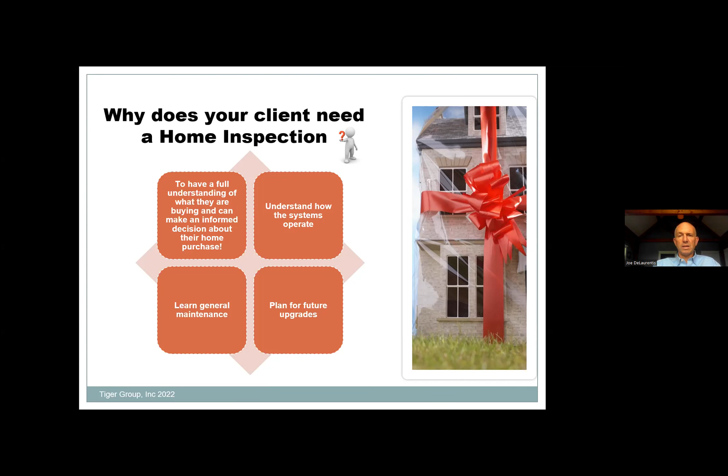The state does require us to inform clients of components that are at or near the end of their service life, so they understand they may need to save money for a furnace, roof, or other major component. Managing those expectations is very important.

No home is perfect, but that doesn't mean it isn't the perfect home for that buyer. We work with clients looking for everything from turnkey homes with nothing wrong, to others definitely looking for a fixer-upper, whether it's a little sweat equity or a contractor looking to remodel and resell. So it's important to set these expectations with clients.

My slide is frozen here. There we go. Managing those expectations can be as easy as forewarning clients what to expect, whether buyers or sellers, about the inspection. What's the inspector going to tell them? Do they need to be concerned about every little maintenance tip, or are we looking for the more important components and concerns?

The home inspection definition comes from the state of Connecticut, part of our licensing through the Department of Consumer Protection. ASHI is a more prominent national organization as well. You may also hear of InterNACHI, another one. They also have standards of practice pretty close in line with Connecticut's.

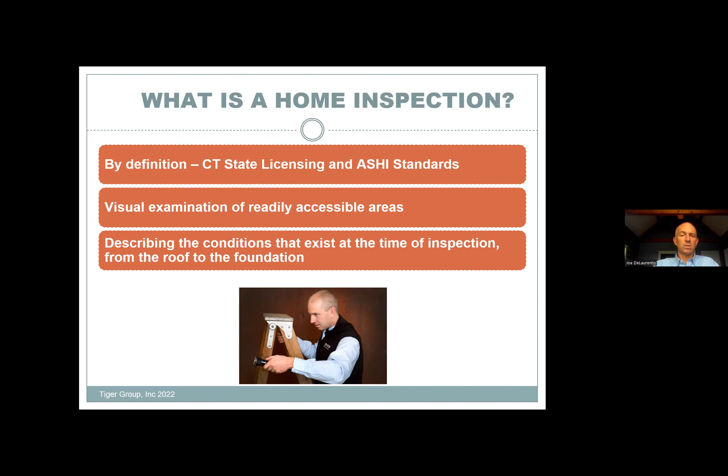Connecticut references a visual examination, and some home inspections glorify themselves a little. We are not going to pull homes apart and start cutting into people's homes to investigate these things—that's way different than what we're allowed to do in a seller's property. We describe the conditions that we see on the day of inspection.

The history of licensing goes back to the early 2000s. Before that, we had great variation in our industry, everything from a handwritten notepad with no form set or guidance, to an engineer's report delivered two weeks after an inspection with a long narrative. This licensing established a uniform set of standards for us.

These standards are required to be provided to every client before the inspection. Ours at Tiger are emailed to clients along with our agreement contract and a statement of the services they ordered, ahead of time for review. One of the bullets there is the most important: our real role is to identify significantly deficient components.

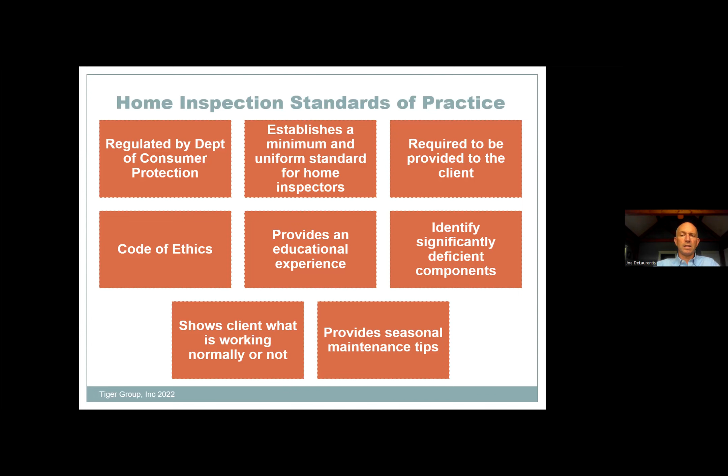Some of the subsequent things that have come out of the service are maintenance tips and an introduction to how a home works, and we tend to gauge that by the interest of our clients. I'm going to run through some of these components of a home rather quickly, and when we get to questions, if anyone wants more detail, we can cover that—some of this is a bit obvious.

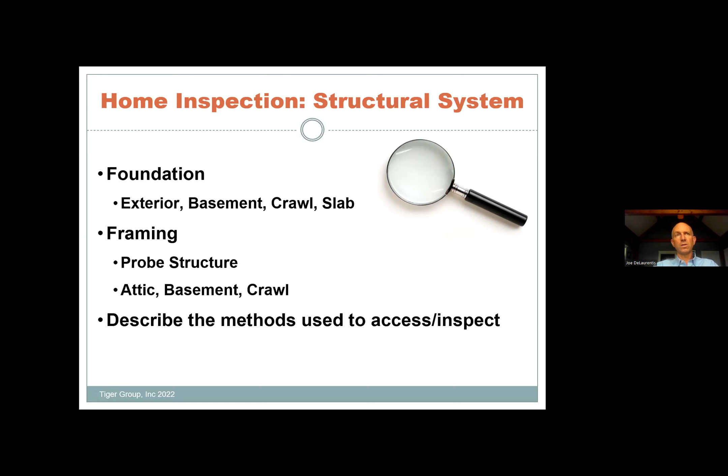We run through structural components, the accessible areas of foundations and framing. The last bullet is important: we're required to describe the methods used to access or inspect these areas—in other words, more importantly, what can't we get to. Take, for instance, a crawl space we couldn't get into; we have to inform clients they may need to take other action to get in there.

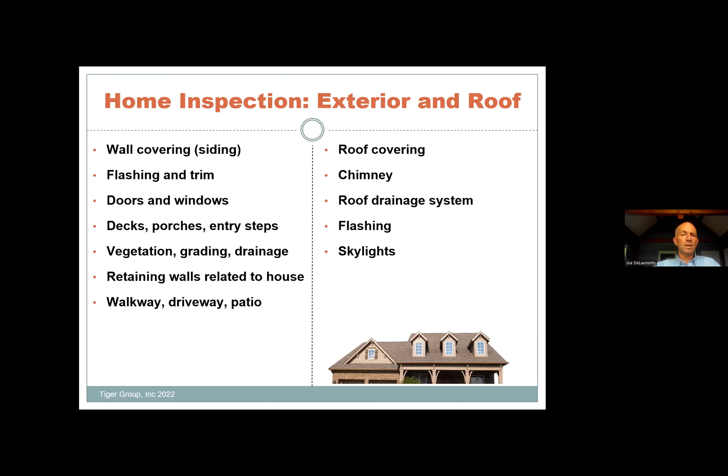Exteriors and roofing—typically these components' primary intent is to prevent the elements from getting at the building. So wall coverings, trims, flashings, and roof covering are always paramount for people. Chimneys tend to be problematic, since as a homeowner, most people aren't paying attention to what's going on at the top of their chimney. And of course, other things like decks and entry porches.

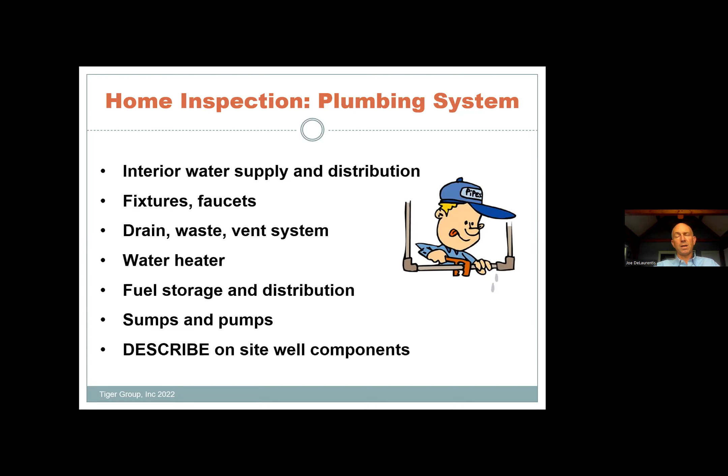And towards the end, we get into well water sampling. We'll also talk about our functional flow test, which Tiger offers as an alternative to not having anything done.

Electrical, we start outside at the service entry. How does power get to the building? And then how is it distributed throughout? Of course, the wiring and such.

You'll see us test at least a representative number of fixtures, switches, outlets, etc. The state uses that term because they recognize that we're not going to move all the furniture, every bit of storage and such to get to every outlet. That should not be misconstrued, in my opinion, down to just doing the one per room that's required. Frankly, I think you should get to, and our Tiger policy is to get to every outlet, switch, etcetera, that we can access to test it.

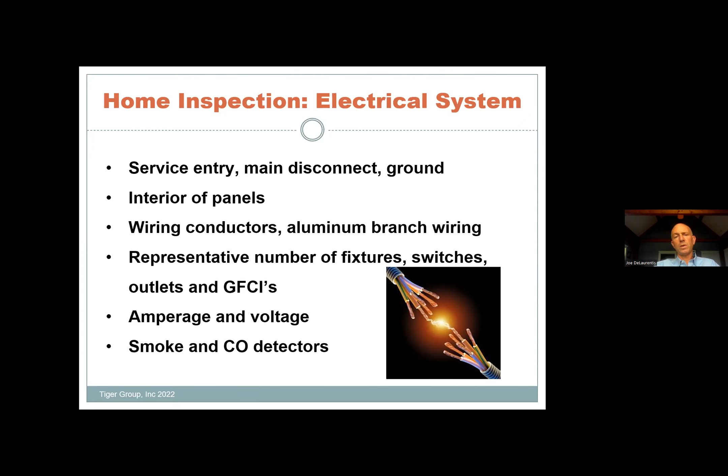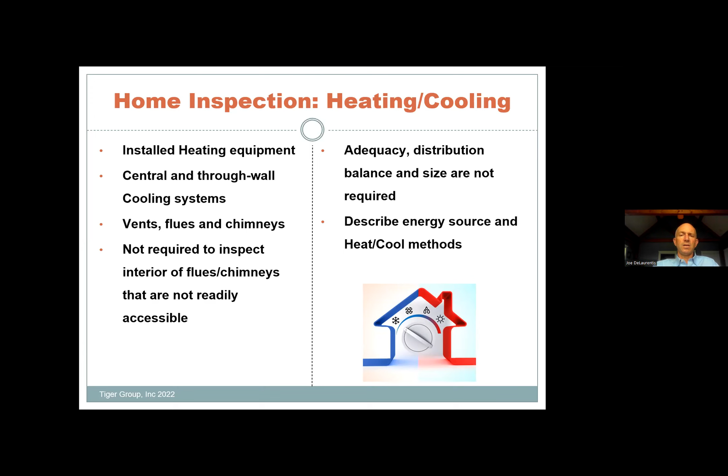Heating systems, cooling systems, of course we operate those systems. You may have some deficiencies seasonally. It's also important to understand that the state does not expect inspection of interiors of chimneys or flues, so we're not dismantling the venting for heating appliances. Additionally, a common question that comes up is adequacy or sizing of a system and balancing, how even is that heat flow on a forced air system throughout a house. All of these things require a lot more diagnostics than is required for a home inspection.

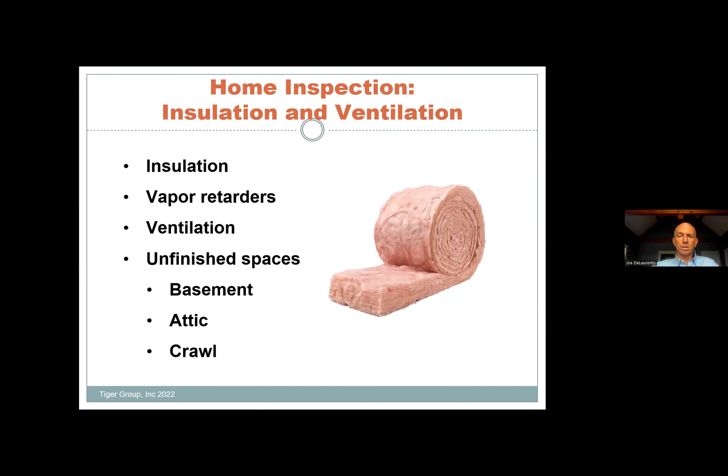Insulation areas, vapor retarders, all important information. We're going to typically alert our clients to what's there, or if what's there is damaged, missing, etc. It is not an energy audit that's going to test the whole home energy efficiency or blower doors and make recommendations to bring everything up to current energy standards.

Interiors, it seems quite repetitive when people are watching a home inspection. We're looking at all of those electrical outlets, operating all of the windows in the house. Yes, some of these can be simpler type items, a window that doesn't work right, or locked hardware that's not functioning. But really why we sample all of them is to try to see, is there a bigger problem? Is there a repetitive issue? Are we leaning towards the fact that these older windows have so many issues that maybe restoring them isn't the best course? Perhaps the client should look at window replacement budgeting.

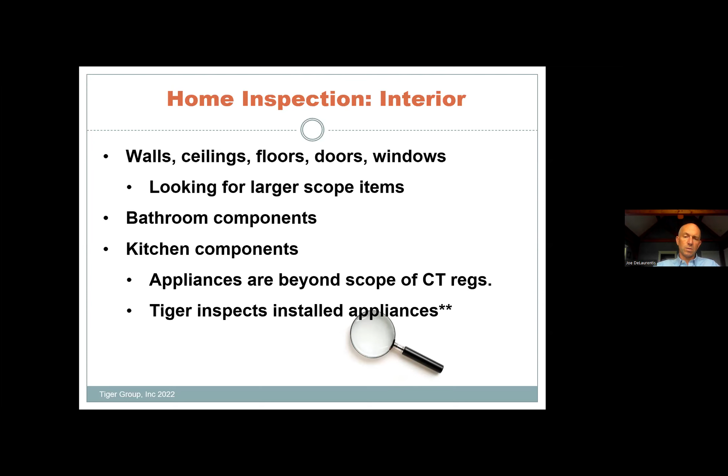Kitchen appliances are exempt from the standard of practice in Connecticut. However, you will see some variation in the market. We at Tiger have chosen to inspect those that are permanently installed appliances. That includes cooking appliances, ovens, cooktops, ventilation for those, installed microwaves. We do not inspect laundry equipment or refrigeration, so be aware of that as well.

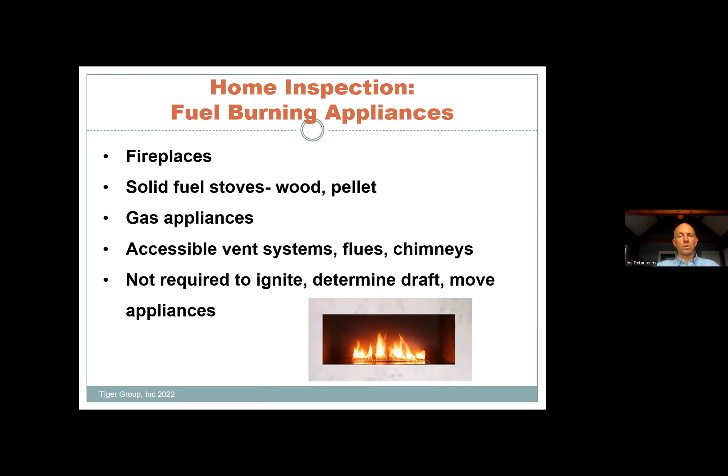Fuel burning appliances, we will inspect wood stoves, pellet stoves, other gas stoves, and fireplaces themselves. Seems obvious, but we are at least a few times a year requested in the winter to ignite those and test them. Certainly not something we can do with wood fireplaces. Of course, if there's a remote available or controls for a gas appliance, we would certainly be able to light those.

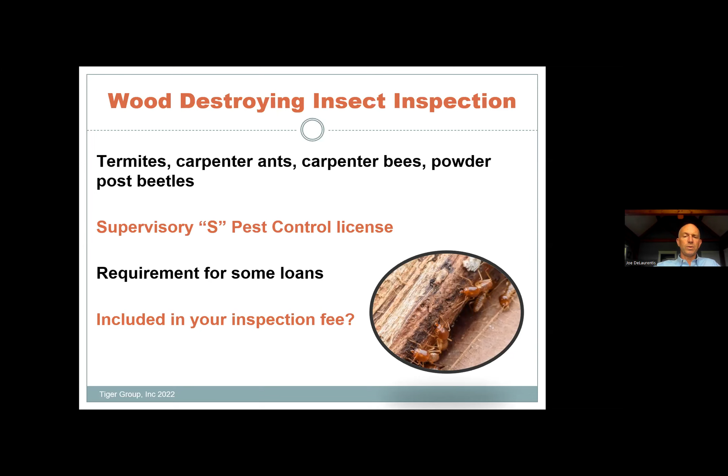Kara mentioned the wood destroying insect inspection. This is not required as part of a standard home inspection. Be careful of people that say something like, yes, I'll look around for them, but I can't provide the appropriate paperwork. This tends to be a little bit gray when push comes to shove. Perhaps someone needs the National Pest Control form, which must be filled out by someone with the pest control license for their lender. And this is where you get day-before-closing concerns that come up. So at Tiger, as Kara mentioned, we have licensed personnel to provide the wood destroying insect report with every home inspection. It's included in our fee.

So what about reporting? Well, we believe verbally we should explain and direct clients, as well as in the written report, to correct or monitor a situation, describe some simple maintenance tasks to people. When needed, the state recognizes and states that you should suggest further evaluation by a contractor, a tradesperson, a specialist, perhaps, in order to determine the extent of a concern, the scope of work to repair it, perhaps, and any pricing.

It's always important that people attend. They get much more value out of their inspection process if they do so.

Any questions, Kara or Sue? Who's doing questions? Sue? I'm doing questions. Thanks, Joe. I have one that just popped up. Yep, and I have two that came to me separately.

Sometimes you see orange or black lines on the walls in the basement. What does that mean?

If you're referring to stains on the foundation that start at the top of the wall, I'm not sure about black, but orangey dirt-colored stains are typically from construction, when they're backfilling the outside or inside of the foundation and mud and dirt drip down the walls. If you're referring to black, it's not so much in the basement, but you could have carbon accumulation from soot, maybe a puff back at a furnace or oil appliance. It's hard to give a good answer without knowing the circumstances.

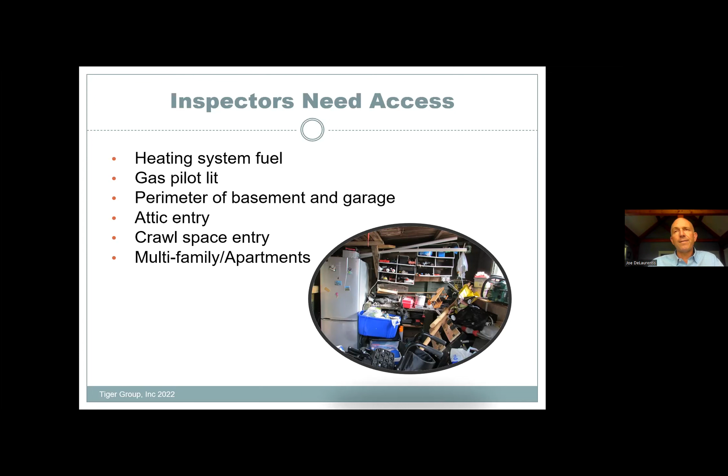All of these make inspection day go a lot smoother. Time on site is important to everybody involved, clients, sellers, you as realtors. So the smoother path that we have, the more efficiently we can go through without having to ask permission to clean all the storage out of a closet to get in an attic.

We just talked about the snow return. Also, remember, air conditioning, now is a great time of year. If you're taking listings in the fall, remember to make sure your clients have their central air conditioning system serviced. There's nothing better if it gets too cold and we can't run those in the winter than having a fresh service receipt to provide to a buyer and say, look, we had the system reviewed and serviced. It's working just fine. That'll help you get past any of those older equipment issues as well.

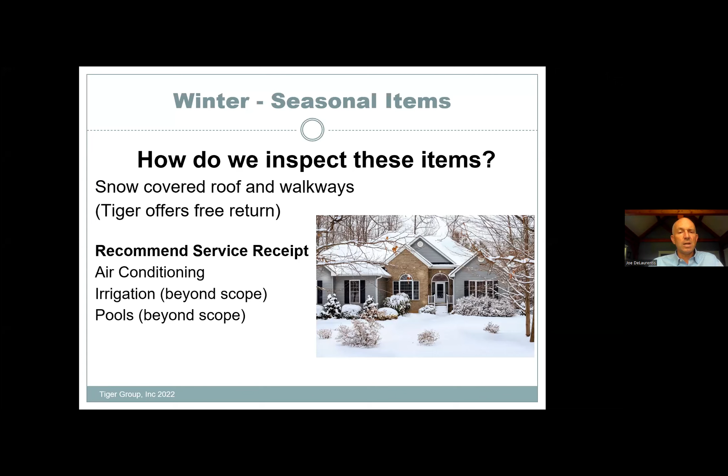The other things that are not part of a home inspection, but good to also have serviced before winter, are lawn irrigation systems and pools, so that again, you take the wondering out for the buyer.

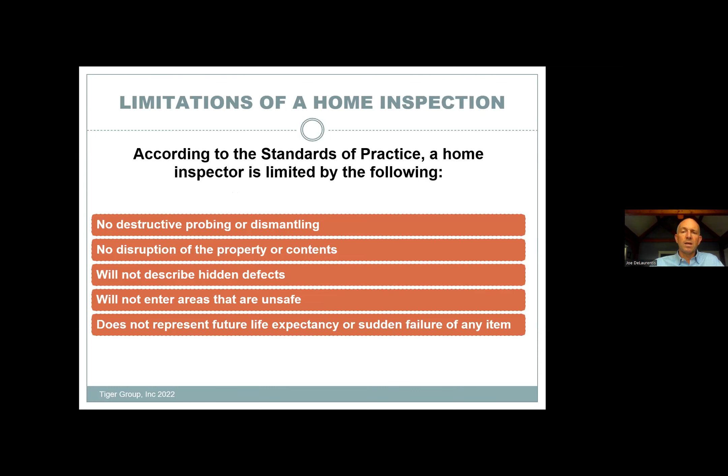Some of the limitations that the state recognizes: destructive probing, dismantling of things. If we see a large ceiling stain and we're not sure what the cause is, we're certainly not able to go ahead and cut that drywall open. There may be hidden defects behind some of these things, and representation of future life expectancy, or exactly when something may fail.

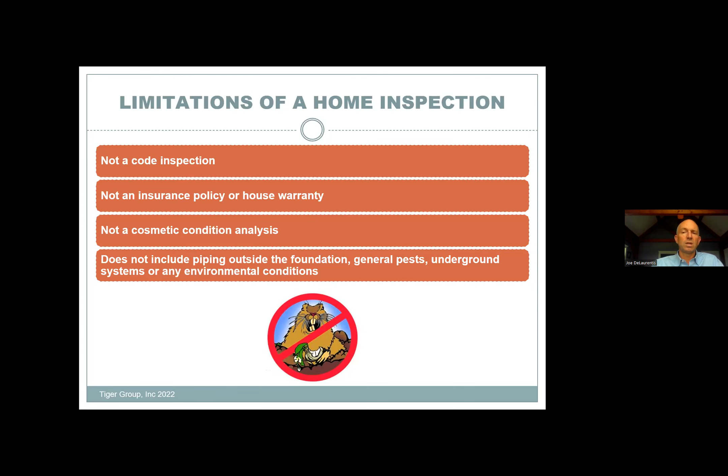Insurance policies, home warranties, all provided from different sources and not, according to the state, part of a home inspection. They also recognize that piping outside of foundations, general pests, underground systems like oil tanks and such, according to the state, are not intended to be part of a home inspection.

I talked a little bit about reporting already. We use a summary with our report, both verbally at the end of the on-site inspection and in the written report. The state does require that a written report be provided to be considered a home inspection. So keep that in mind.

You'll see some variation, but most of what's in the market is delivered either through website link or by email, and perhaps would include pictures, and some will include the summary.

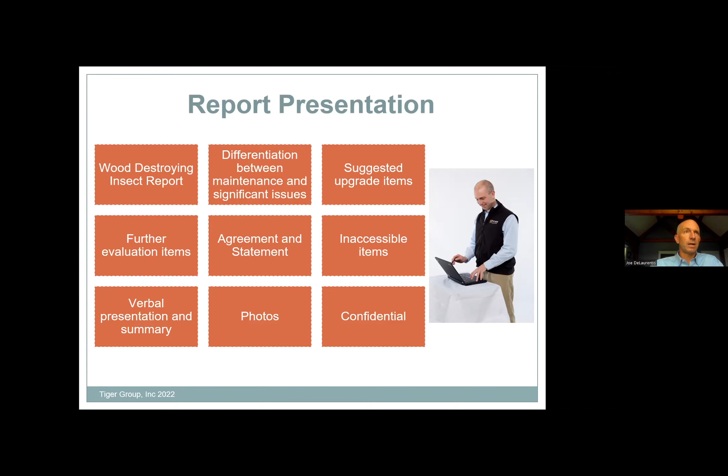We also, like you from Consumer Protection, have a code of ethics. We are supposed to maintain the reports as confidential unless we get permission to deliver it to other parties. So perhaps, again, preparing for inspection day, have that conversation with your buyer client so they're aware if they want to share reports with you as realtors.

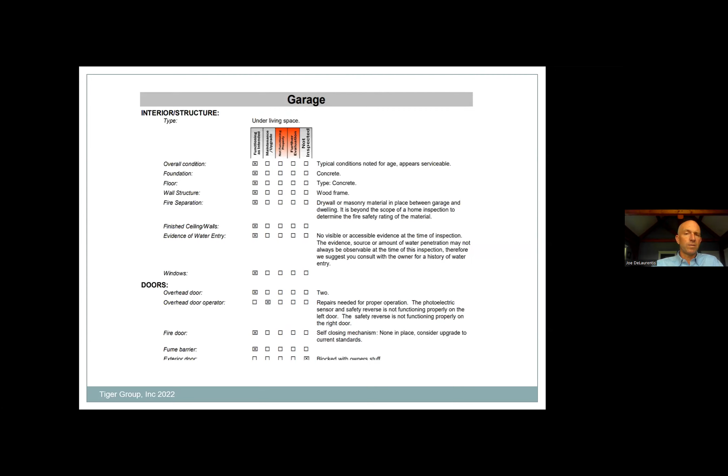Quick example of our report page. There's a rating system in the center. The two highlighted, or orange, would move things over to the summary area. Those are things that are not functioning properly. They need repairs, replacement, or recommendation for evaluation by a contractor. The narrative to support why things are rated the way they are is in the right-hand column, and the report is effectively broken down into each different section of the building.

Another question break. So you got anything? Nope, all set. All right.

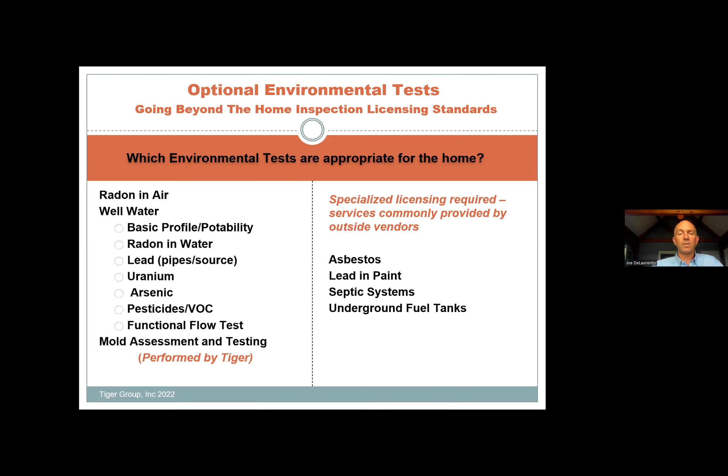Moving on to optional environmental tests that may go along with a home inspection. Many of the standards, radon, air, well water, are fairly typical. We also offer mold assessment, which we get more and more inquiries about every day due to concerns with indoor air quality. And then some things beyond a home inspection that may require specialized licensing, like asbestos testing, lead paint testing, septic systems, of course not something that would be part of a home inspection, and underground fuel tank investigation.

Radon, some simple facts about this. And if you're curious, we also on our YouTube page have a 1-hour radon course, and it's also something that we can provide as an office seminar as well.

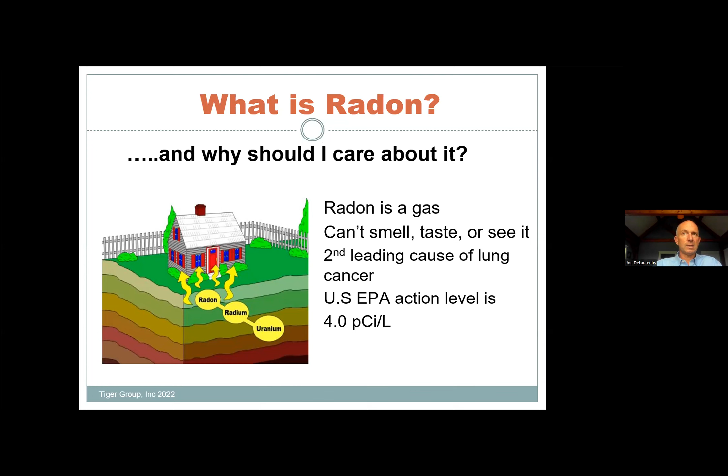Radon is a gas. We can't smell it, taste it, sense it, etc. Therefore, the only way to test is with an EPA approved device. The EPA has set an action level of 4.0 picocuries, in other words, 4.0 and above. They recommend either long-term testing or mitigation. Testing methods, you may have seen some of these on sites in use.

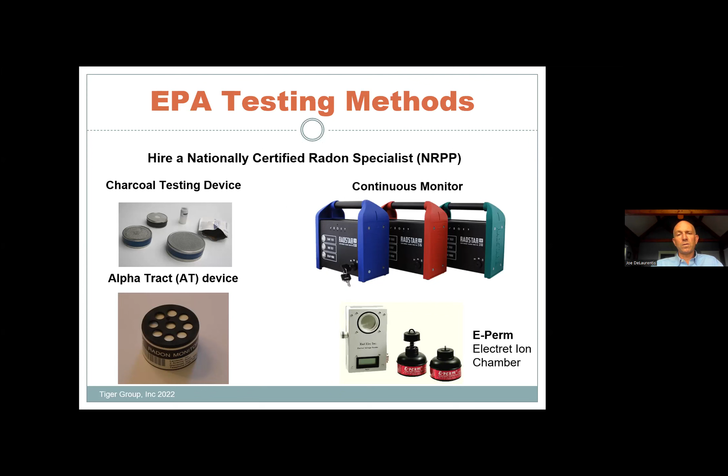We use continuous radon monitors at Tiger so that we can provide good data to our clients. First and foremost, it reads radon levels every hour throughout the minimum 48-hour test. It also tells us temperature, humidity, barometric pressure changes, and there's a tamper alarm. All of these things can be analyzed when we pick up the device to understand: did we get a good test? Was there an impact from that nor'easter storm that came through? Do we need to leave the device for a longer test? The good data, the appropriate data, is what's important for using those continuous monitors.

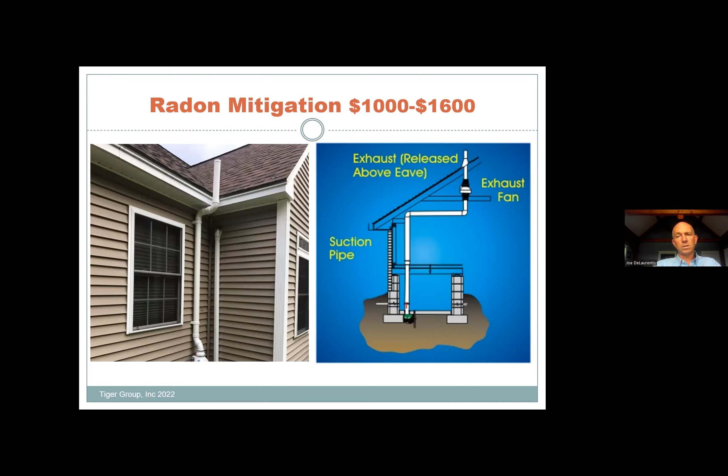Remember, with radon testing, it's important to use certified individuals. Our entire environmental team has to attend a 16-hour course and pass a rather difficult test to get their certification. They also have continuing education, just like all of you, to maintain that certification yearly. This keeps them up to date with the devices, the testing protocols, et cetera, with radon testing. So I find it's more and more important for things like device placement, types of devices used, and using them appropriately, to work with certified individuals.

We'll run through some well water tests here. The first one, staying with the radon theme, radon in water. Important takeaway if you're not familiar with it: the EPA does not have a national level for radon in water. Connecticut's Department of Health has created a guideline of 5,000 picocuries per liter. In the Northeast, we have some of the highest areas. Private wells in Connecticut test averaged around 3,000 picocuries, and they use that as the baseline for setting their level.

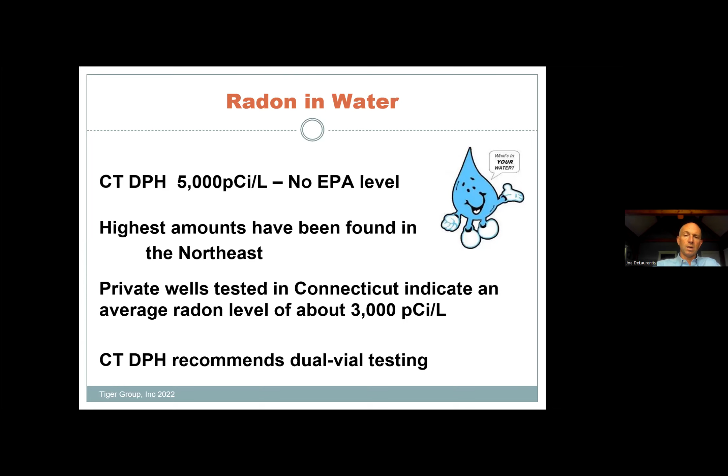Another important takeaway is the Connecticut Department of Health recommends a dual vial sample. If a single vial sample is done, the next step one should take is to take another sample, not to move to remediation or mitigation. This is extremely important when you see some of the prices to mitigate for radon water - you want to be sure the testing was done conclusively. Because of this, we moved a long time ago to doing the dual vial sample at the first visit. It's the only way we offer the test, so our clients get the appropriate information on the first test and don't need to move toward a second.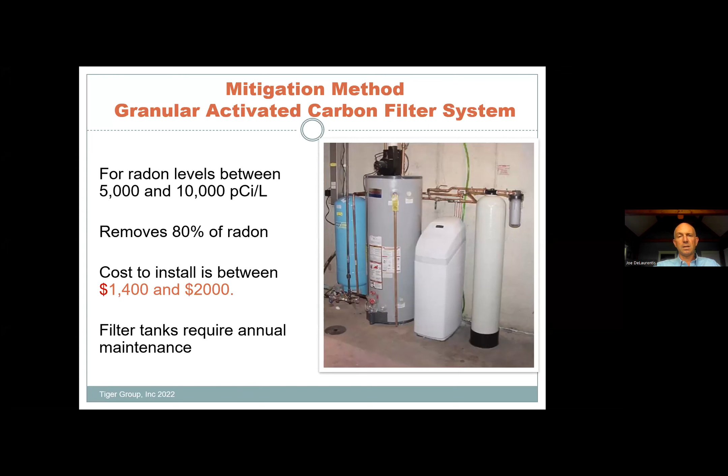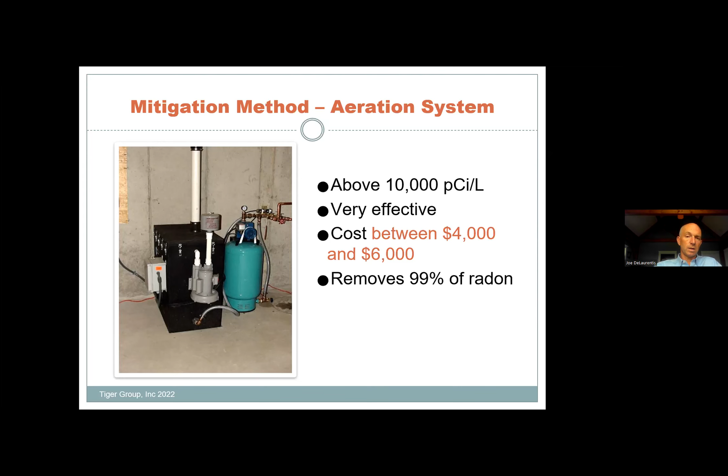The second mitigation method, which is nearly 100% conclusive - and this is where it gets very expensive - you can run almost up to $6,000 for an aeration system, also known as bubble-up systems. They're very effective. You'll see a black canister in the basement with an aeration system, as well as a secondary pump to repressurize the water. So the systems do get a little bit involved.

Next, we have our potability test. This is probably the most common water test done historically - we've always done this one. It includes bacteria and nitrate nitrogen. Those are the most important too, because they can deem the water unsafe for drinking if they're high or present. The others are water quality type items, and certainly many people treat for these. In the shoreline areas, or a lot of Connecticut frankly, we have hard water, minerals in water and such, so it's not uncommon to see a well system with treatment on it.

If you're not working in an environment with wells all the time, remember when you have clients that haven't had a well, they may see a treatment system and become concerned. Setting them up and preparing them for the inspection, it's important for them to understand wells are very common in Connecticut and treatment systems are very common on the wells. It does not indicate a problem per se.

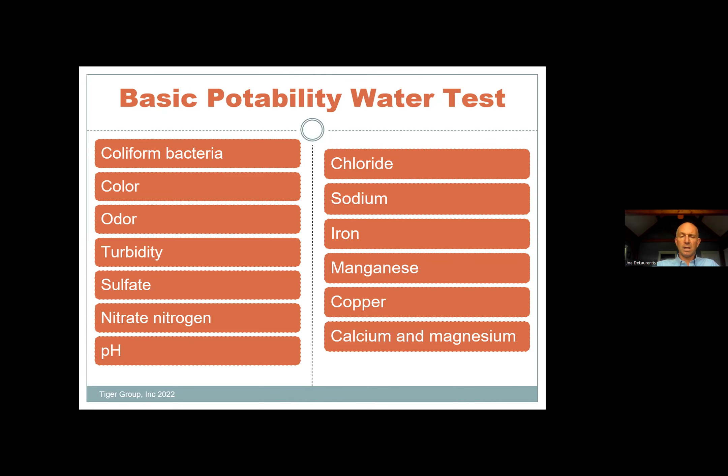Some other water tests we have are pesticides and volatile organic compounds, two examples of site-specific tests. People would do pesticide testing if near a golf course, farm, or orchard, or land converted from one of those to a subdivision. VOCs are also site-specific, related to proximity to an industrial or manufacturing source, or even an on-site oil tank. My neighborhood is near an old abandoned rail bed, and there are some issues with VOCs remaining as well.

Arsenic and uranium—you've probably heard about these either in the media or through client interest in testing. The State Department of Health in Connecticut recommends testing for arsenic and uranium at the time of a real estate transaction, as well as when a new well is drilled. This became more important based on a U.S. Geological Survey, after which the Connecticut Department of Health recognized the potential for elevated levels throughout the state.

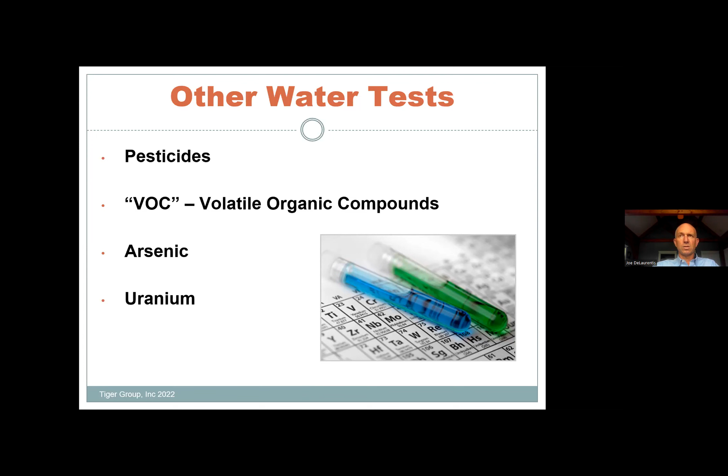Earlier, I referenced the functional flow test. Through our home inspection, although we're not required to inspect the well system, we do inspect it partially to look at the components on site. For clients interested in something more, we offer this functional flow test, where we review the equipment on site in more depth than a standard home inspection and report on the condition and performance of the well.

Once we look at the equipment and see how it's functioning by running water throughout the house, checking household pressures and usage with multiple fixtures, we'll then run the water for another 45 minutes outside and get gallons per minute and pressure readings to determine if there's appropriate water for normal household usage.

Remember, these tests are different from a yield or recovery test. Yield tests are done when a new well is drilled. Recovery tests require removing the top of the well, measuring how much water is in it, draining it down, and seeing how fast it physically recovers. We don't get involved in that when we do a functional flow test. I'd definitely advise people with concerns—maybe the seller disclosed something, or they've never had a well and are extremely concerned—to take the next step and get a well company to do a recovery test if there's more of a concern.

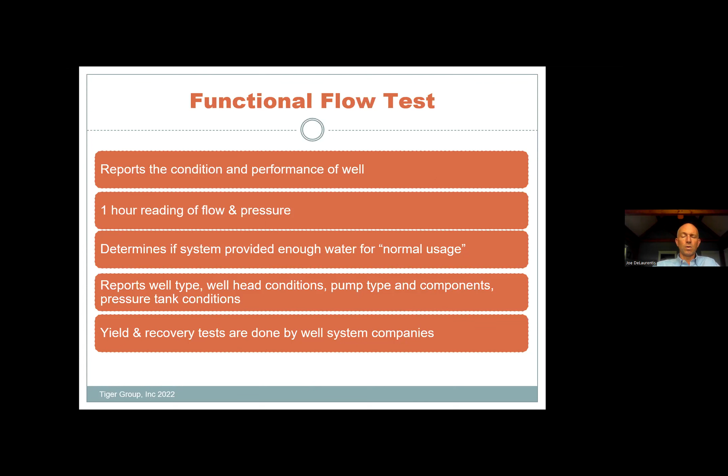Moving on to mold in homes. Some 10 years plus ago, we were getting consistent requests for mold testing and referring those out. We never really wanted to be in the mold assessment or testing business, but by nature of continued requests and the knowledge we already had about homes, we've created a mold assessment.

In order for mold to occur in a house, you need moisture—this is really the key to all of this. That can be in the form of a leaking roof, plumbing issues, damp basements, or improperly vented appliances, as you can see in some of these diagrams. Frankly, we as occupants and the way we use houses make a lot of moisture. We're continually changing sealing, insulation, and construction methods, and sometimes it's trial and error. We see more moisture accumulation, so we're dealing with a lot of mechanical ventilation now in construction.

Once that moisture combines with an organic material—wood, wallboard, anything mold can grow on—after the moisture saturates it, you get mold growth. From there, what impacts us is the spores released into the air. That's why you see mold testing that includes indoor air samples.

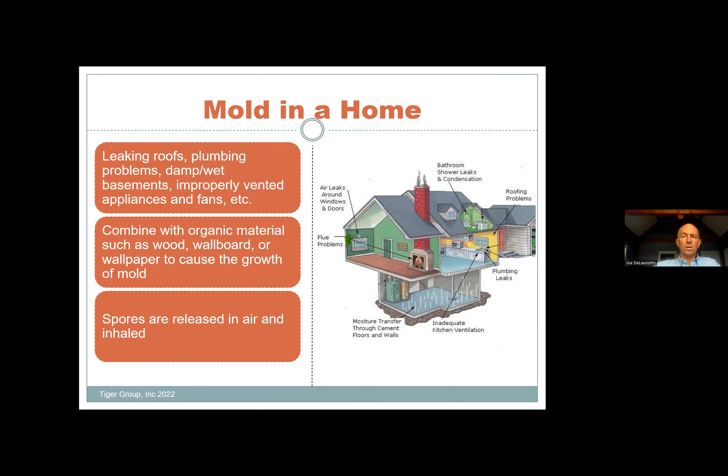Who needs a mold assessment? We get requests from a variety of clients. Some may have had a prior issue in their home, like a water entry event. Many simply have allergies, or family members do. There may be increased sensitivity groups—those with respiratory or pulmonary issues tend to fall into increased risk, and they may want to test their properties as well. Outside of real estate, we've seen increased interest, working with more homeowners on their own indoor air quality after they've been living there a while.

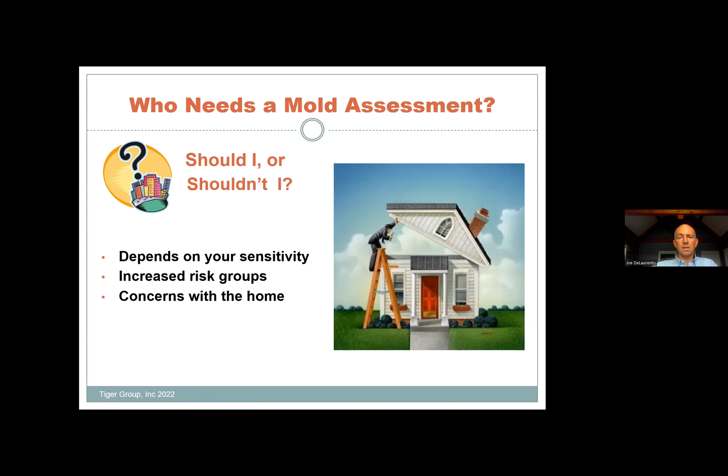Maybe now they're home office in the basement or some such, and they're continually sneezing, affected by indoor air quality. So we're seeing more requests for that.

So what we did to develop our mold assessment, we noticed in the industry there were remediators who were doing some testing. Most of them came from an insurance or water cleanup kind of environment, and may have had some dramatically expensive solutions to mold problems. Others, we saw some simple sampling being done by home inspection competitors.

So we wanted to include a thorough assessment of the house, including looking for mold, of course, but any moisture sources, some advanced tools. We use infrared cameras to find temperature anomalies that can lead to moisture issues. We follow up with checking those areas with a moisture meter, and going through the house as part of our site inspection.

From there, we make recommendations to clients based on their input or interview as to their concerns, as well as what we found, to talk about where they would like to sample. Do they want a surface sample of some visible mold? Do they want air samples beyond the normal living spaces, perhaps in a specific bedroom or some such? Those samples are then analyzed by the laboratory.

When they come back, rather than sending our clients this very confusing and sometimes quite scary lab report alone, our mold assessment staff takes that report, looks at it, compares it to what they saw on site, draws some conclusions. Okay, we need some standard homeowner cleanup at a small amount of mold that was identified, didn't cause, as an example, some high levels on the lab results.

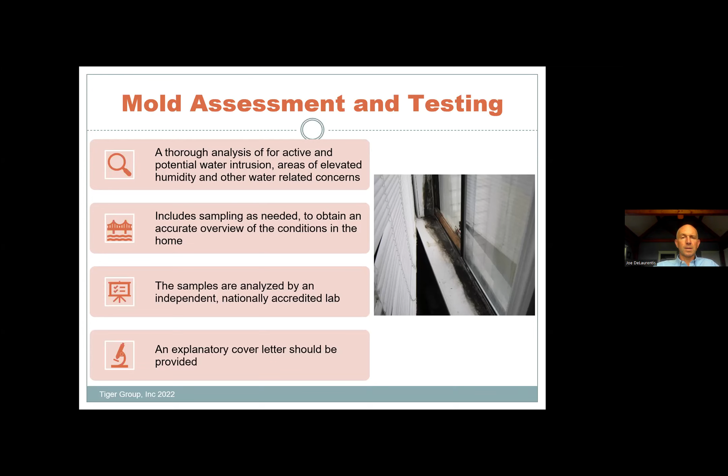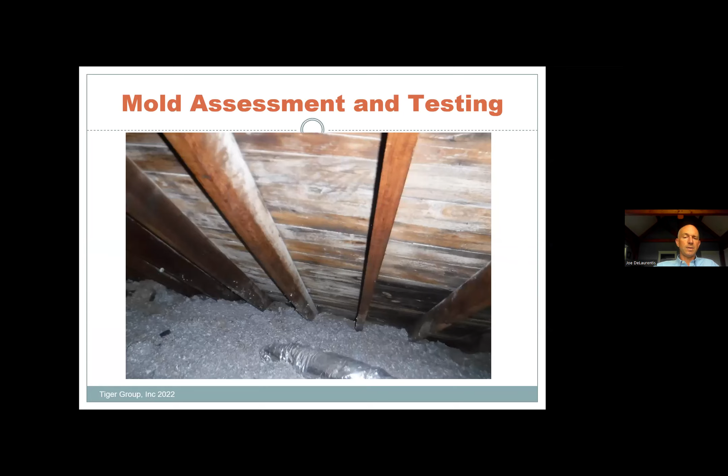Very, very commonly, we're seeing moisture accumulation from condensation in attics, and of course the opposite in basements. This time of year, with that run of high humidity that we had, we tend to see the moisture accumulating there in the summertime, attics in the wintertime.

Moving past mold to some of these other tests that we don't do as home inspectors. Asbestos testing or inspection in Connecticut requires an asbestos abatement license. Unfortunately, there is nothing between A and B, and the abatement license is quite difficult to get. So you need to get a licensed abatement company to do any sampling or confirmation of asbestos materials.

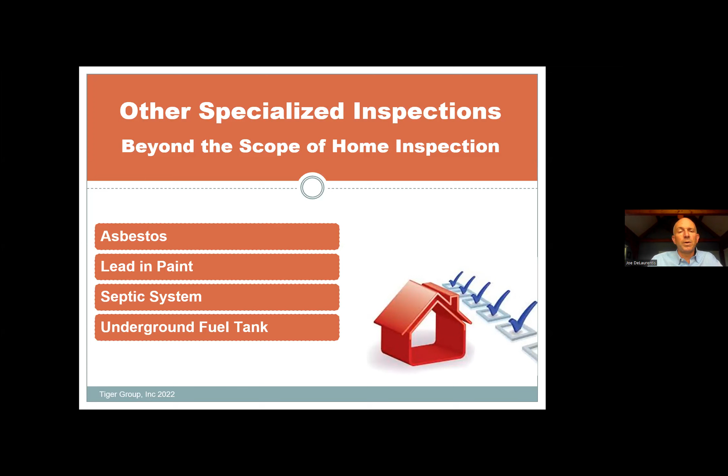Lead paint, of course, can be tested. Septic systems, we'll see a quick image there to help you understand what they're doing. And then, of course, underground fuel tanks.

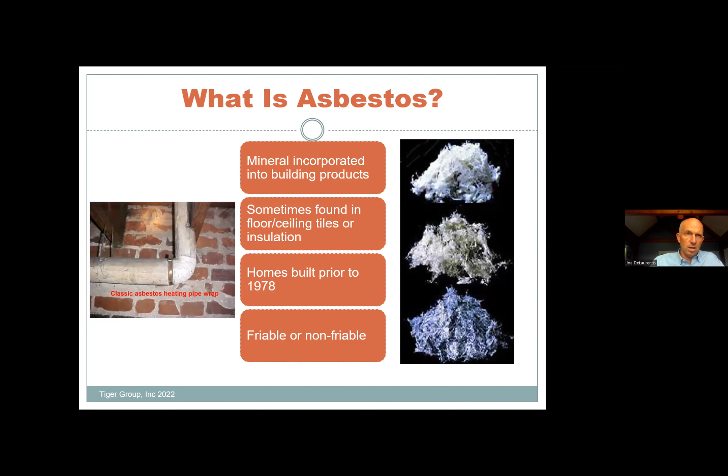Some samples of asbestos, you most commonly see it in some of this pipe insulation remaining. We'll see another image of vermiculite insulation, but built prior to 1978, so easy to remember based on your lead paint disclosure date as well. Can be in floor and ceiling tiles, heating insulation, heating appliances, and things like that.

There's that vermiculite. Zonolite, if you're able to write that website down, zonoliteatticinsulation.com. I can't confirm it, but there may still be some money in that class action lawsuit to assist in vermiculite abatement. We see this most commonly in attics, but often in walls as well.

It's a loose insulation that would have been installed. Sometimes not possible or difficult to see because it's been insulated over with loose insulation, like a loose fiberglass or even fiberglass batt insulation. So something to be aware of there.

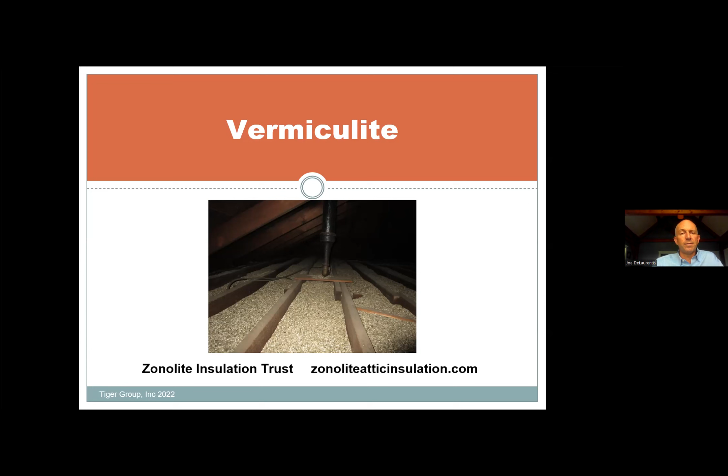Important takeaways for clients are the ages here, heaviest in the 40s to 60s. 1978 is when they lowered the content allowed in paint and lead paint there. Their disclosure does a great job of informing people. And frankly, when asked, if you're buying a house built before 78, you should be aware of the potential presence.

Take necessary precautions. There's great information from the EPA. You know, if you're doing work yourself, and if you're hiring contractors, they are required to be certified to work on older buildings as well.

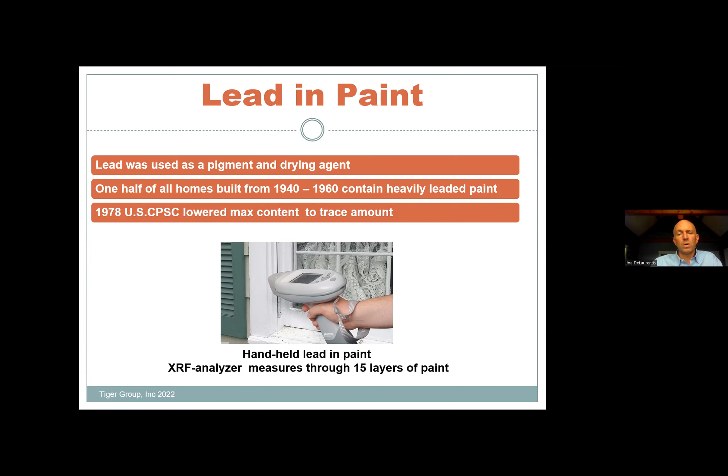Then levels in the tank to make sure everything is leaving the tank appropriately. When you hear conversation about baffles, those are intended to - sorry to gross you out near lunchtime - keep the

solids in the tank and let the effluent leave and go out to that leaching system. If you hear conversation about a distribution box, that would be right next to the tank where the pipe splits to 2 runs. That's where you have a distribution box that can get clogged. And then, of course, the leaching system is underground, not usually accessible, only able to be viewed with a camera,

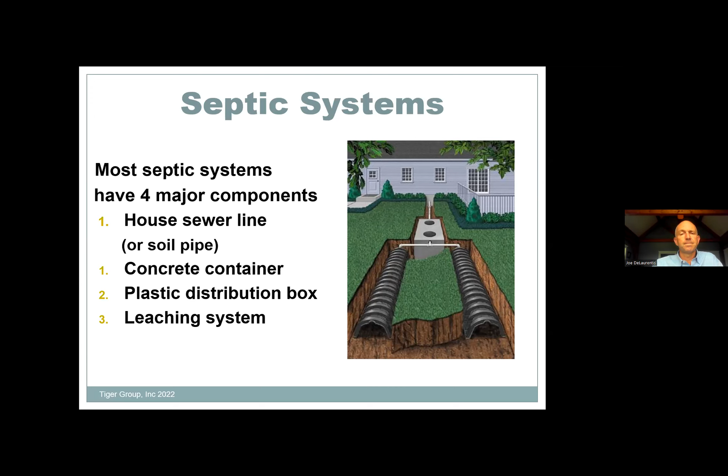which a lot of septic inspectors are using now as well. Underground fuel tanks, by the state's definition of a home inspection, we're not required to inspect for them.

We may see some indicators of a prior oil tank and recommend to our clients to do some homework, find out from the sellers if they have proof of removal or if there was ever anything on site. Sometimes you need to go back to the fuel delivery companies that have been servicing the house, or perhaps the local fire marshal - that's usually the local authority that kept track of that. Very difficult with our small towns in Connecticut to have records and find out who did what when, but that's the best course of business there.

There's no state regulations for tanks less than 2,000 gallons, so most of our residential stuff does not have to be removed. However, lenders and/or closing attorneys most commonly are going to suggest proof of removal or abandonment, or getting it done beforehand.

Tank life varies dramatically by site conditions. Was it put into moist, damp soil? Was that tank scarred at all with the excavator when it went in? What kind of quality of tank was put in? And we're referring to steel tanks that are the concern.

You can actually still install a newer concrete tank. They have all kinds of safety precautions in place and such. Not commonly done, but you may run into some of that as well.

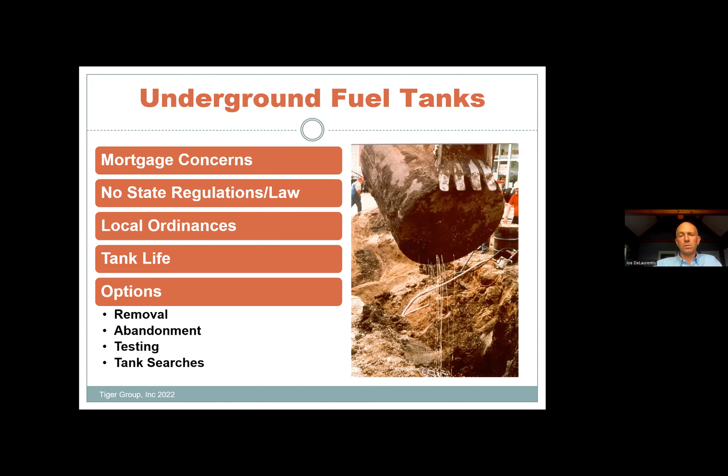Any questions, Sue? Yes, I have a couple. I'll talk about mold first. If mold is outside, how can you tell that the mold in the house isn't just from outside?

Great question. Any mold air sampling should be done with a comparison, so we always take an outside control sample, same day, same time, and then any interior sampling is compared to that sample. Best case testing has the house closed up, meaning windows and doors other than normal entry and exit, just like radon, for 12 hours before mold sampling is done.

Is a mold assessment part of the general inspection, or is this an additional service? It's an additional service - another great question, sorry I ran past that - because it's a different set of certification and different process. We do have a separate fee for it. That fee starts at $425 and includes 2 samples, and then additional samples are charged independently based on the client's choice of how many they want to do.

Okay, that's it for now, actually. Great, thank you.

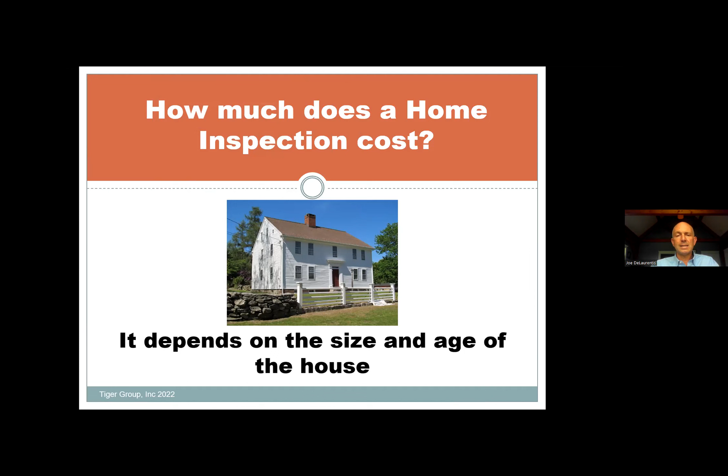Prices of home inspections - you will see not huge variation, but some variation in the market. Key takeaways for clients is what's included. Often a big variable is whether or not the wood destroying insect or termite inspection is included. But generally it depends on the size of the house, perhaps the age of the house, and any additional significant outbuildings, barns, apartments on site, and what have you. Average fees should be in the 500 to 700 range.

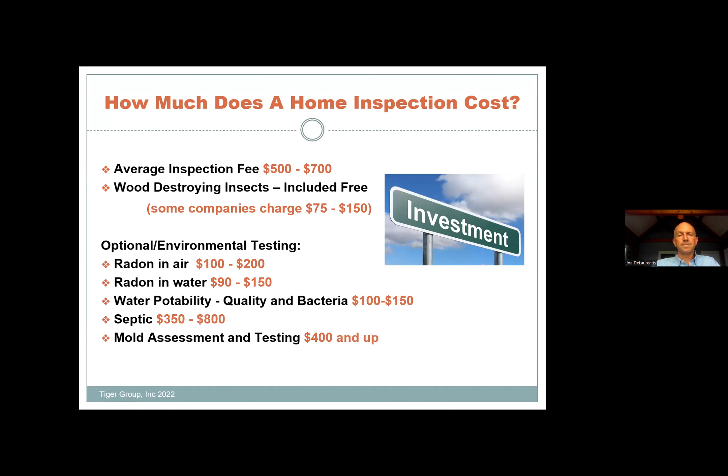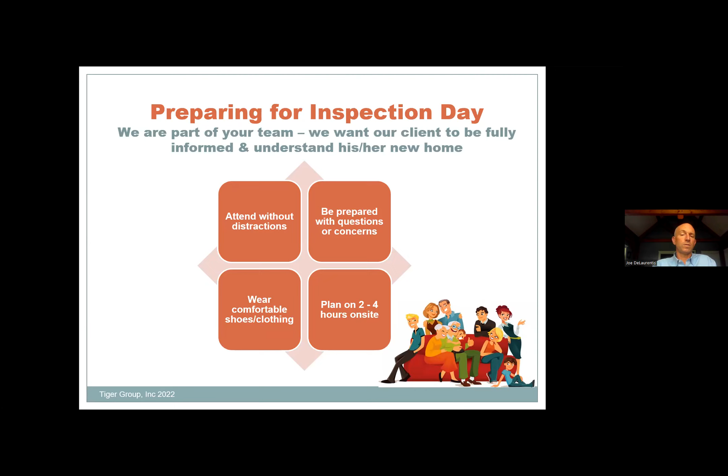Preparing for inspection day - I've touched on this a little bit throughout, but prepare your clients to attend as best as we can in today's world without distractions. They should be prepared with any questions or concerns. That's how we start every inspection, talking to our clients about what they've seen, what their specific concerns might be. Plan on anywhere from 2 to 4 hours on site based on size and complexity of the house itself.

Remember to prepare your sellers as well. Makes things a lot easier when the seller is not there, however many people have to be if they're going to be around. Important for them to understand - one of the biggest shocks we see is they don't often know that the buyers might be coming, and the buyers might be bringing their parents, kids, friends, their decorator, their contractor. So prepare your sellers just as much as your buyers for what may happen on inspection day.

Choosing a home inspector, it's important to understand that inspectors should be fully licensed. There is an intern program in Connecticut required to get our licenses, which is 100 inspections done under a supervisor. Once you satisfy that, you can take the National Home Inspection exam and get your license. Unfortunately, Connecticut left out any cap on the time frame to do that, so you're actually allowed to run and own a business for an unlimited amount of time under that intern permit. Therefore, it's important for people to know they should hire a fully licensed inspector.

Insurance is not required in the state of Connecticut for home inspectors. This is an important differentiation. As a responsible business, we carry errors and omissions liability insurance, and because we have employees, workers' compensation insurance. This is also important from the listing perspective - you want to know that people coming onto your properties have insurance should something go wrong, whether something breaks in the house or the wind blows a ladder off the roof onto the seller's car. This is all important protection to prevent headaches for all parties involved.

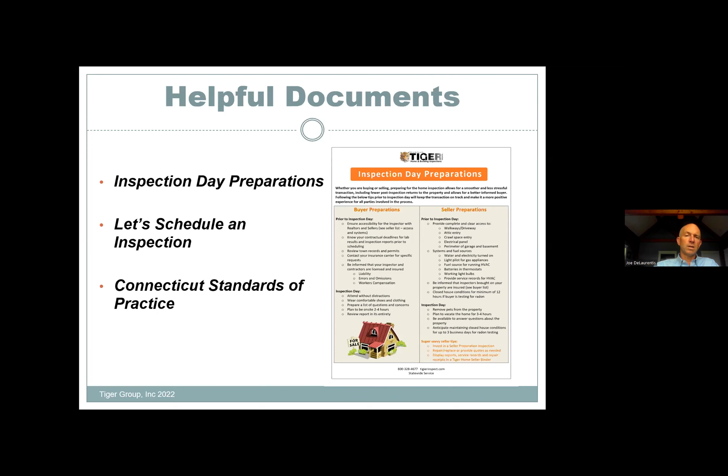Some helpful documents we'll send out to all of you: an inspection day preparation document with reminders of things we spoke about to give to your clients, both buyers and sellers, and another document for scheduling an inspection, with things they should have prepared as well.